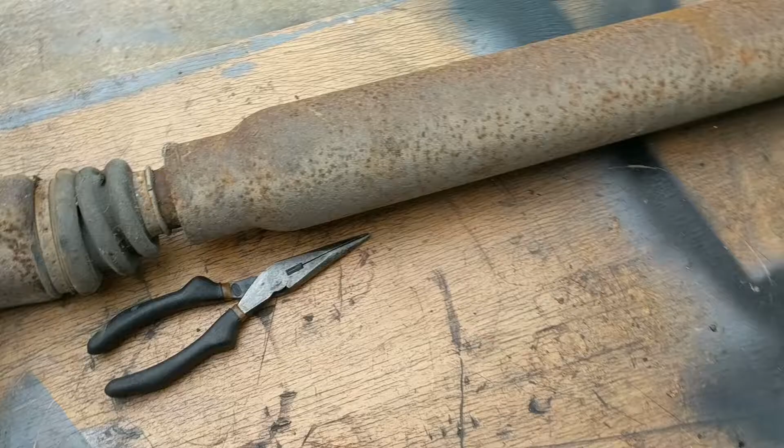Okay, the boot's got a little crack in it, so I'll replace that. I think this is pretty good shape otherwise.

Gotta get all the rust off it. I can't, my sandblaster got burnt down, so...

I hope it comes in within this area, but I doubt it will. Now this is the rusty one that I'm not using, but this is the same size, and it looks obviously a little bigger. So I'm gonna have to use some kind of adapter, and it looks like it might fit in that side. So who knows? Maybe I'll just be slipping it in.

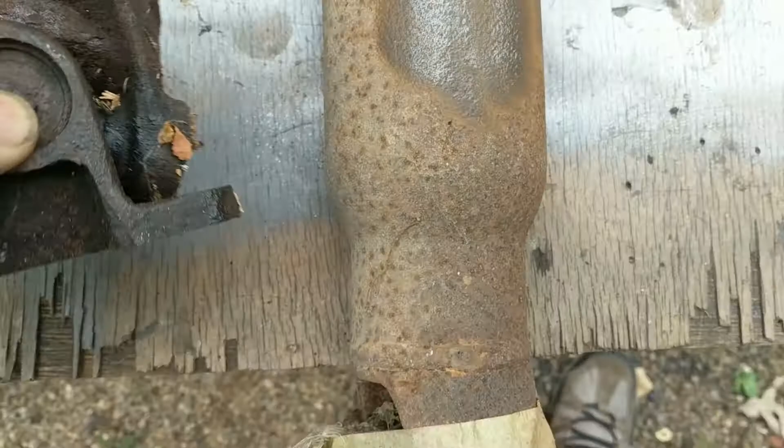I'll get one of these. I think these are Dodge Neon boots, they're on eBay for $200 or $250 freaking dollars, some bullshit. Get that one done, I'll show you. There's a couple different styles of these - one can be slipped in through, and one has to be slipped over.

I believe this is the over style because it's got this. I don't know, I gotta look at the manual, but one of them has to be slipped over, and one has to be slipped in. Can be slipped inside, you can see it moves about.

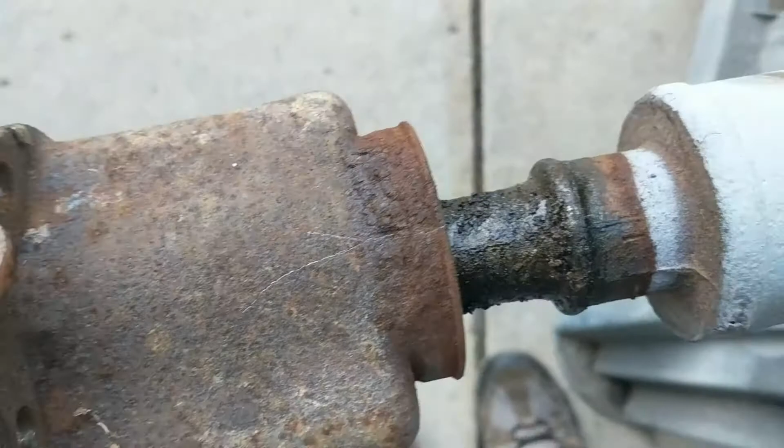It moves a pretty good amount. It moves probably 2 inches. The length of this guy is what it moves. So I let it kind of fall naturally where it was originally stock.

So I need to get this super clean to be able to get a good seal here and here. But I might go over this way - it's a long way to go with that small end, but we'll see.

I gotta get this open. Grease looks pretty good in here, actually.

It's a little rusty, but it's all cleaned up. I didn't have it sandblasted, but at least all the rust is off of it. Got some primer on it.

So the boot is a Dorman 614001 constant velocity joint boot kit.

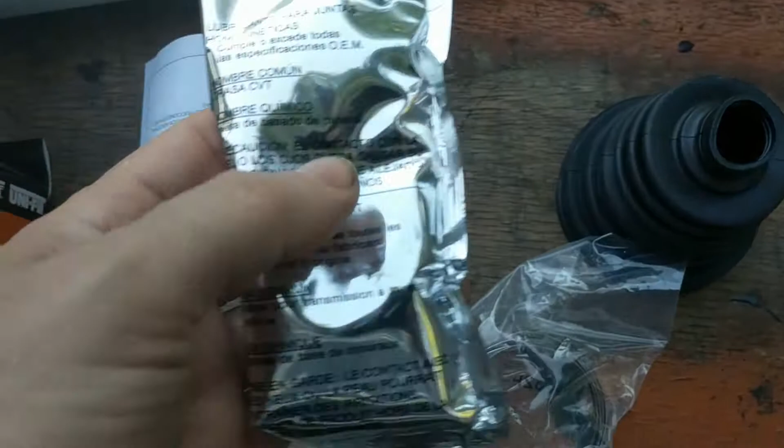Now this is joint boot grease, and you're supposed to fill it up, but I wouldn't do that. They are talking about centrifugal force, and I don't know what kind of grease this is, I'll see. I just don't think it's as thick as normal, so I'm just going to do what I need to do, get enough of it. So anyways, you use this guy, and it's a pretty good thing.

You just cut it as you need. So I'm going to cut it right here, and then obviously getting it on. We'll see about getting it on.

Somebody said take it from - well, some of the other ones you put in through the boot, in through here, and you take this cover off. I'm going to do that real quick, and you put it inside. And then another guy said just slip it on inside out all the way across the drive shaft.

I'm going to get color paint on the drive shaft here right now, a good black, like gloss black. So I'm going to get this off of here, get these cut, and get the cap off of it here.

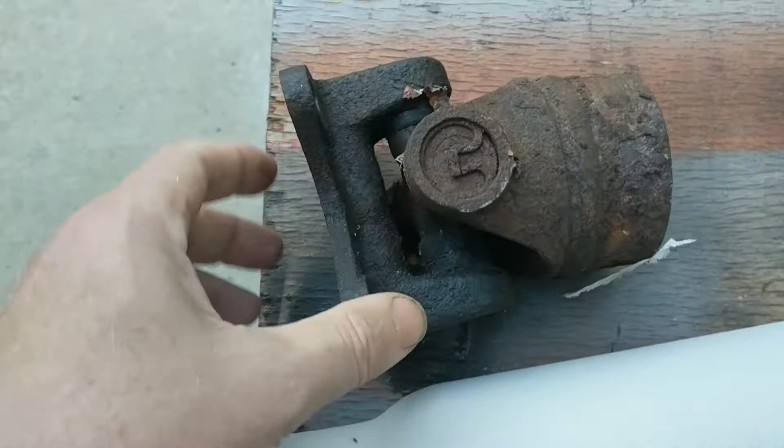You'll notice this is the end I'll be using. This is not the end I'll be using, but this is a rusty version of the end I'll be using. It's already in the car. I'll be taking this off of here.

More than likely I'll be cutting it off here. The drive shaft is too long with the Hemi, so size-wise it doesn't seem - it might perfectly slot right in. I don't know, so I've got a couple, 3 or 4 extra inches on the one in the car.

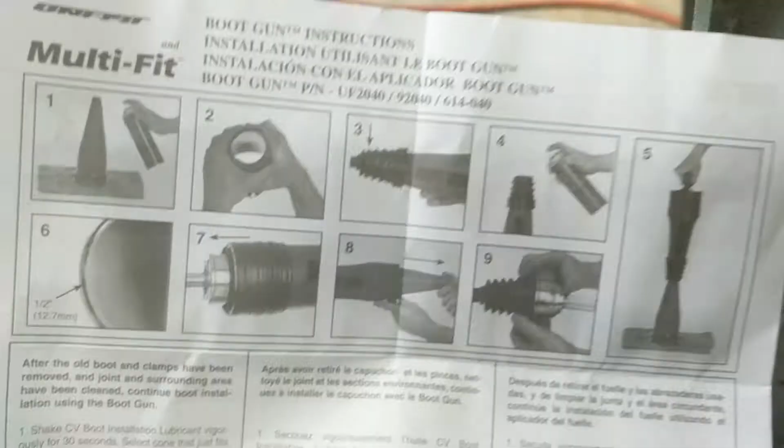So I'm going to go ahead and stick this up there and measure it first of all. Instructions show you using a boot - you have a boot gun, it's just a cone. You can use a funnel as opposed to pay the extra $10.

And then you spray it with stuff - some kind of, of course they have their own special lubricant, sure. Comes in the kit, I'm sure. Wipe it off, fill it full of grease, etc., etc.

I'm not going to do it on the car.

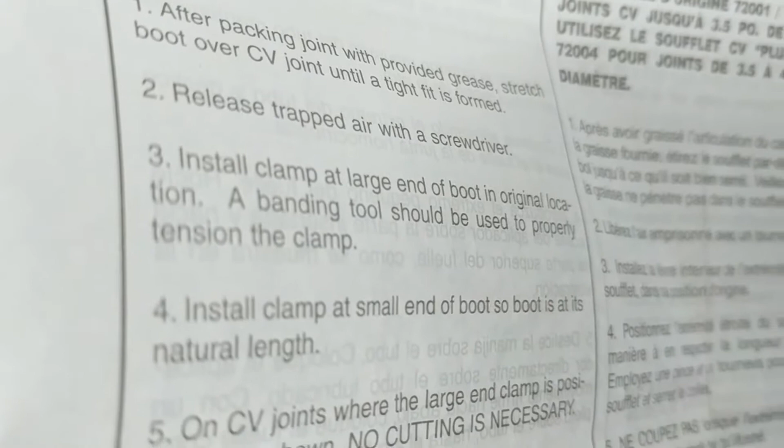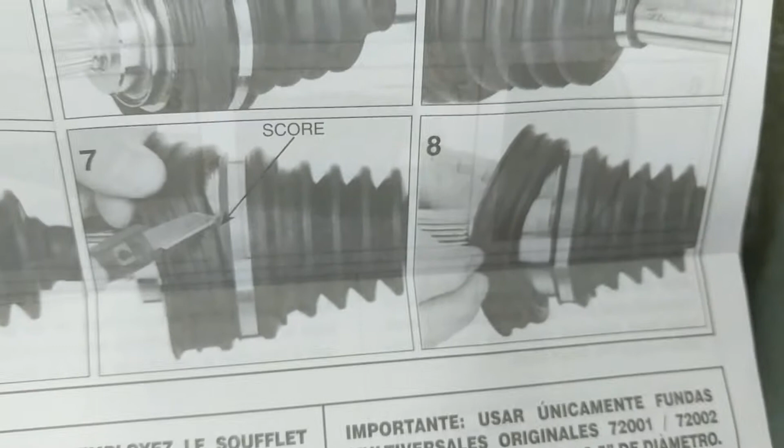Use the right size, release trapped air, pack the joint with the provided grease, and clamp it. They use, I don't know if it's a special tool or not, probably sell you one, but I think it's like a crimper. I think I have a crimper that'll do something similar. They cut it off after, just score it, so I'll probably leave it on and cut it off when I get done.

I kind of got rained out, and then I ran out of welding gas, so I couldn't weld the end on. But it's all cleaned up. There's some original grease in it, I guess it would be the fibrous grease, whatever it is.

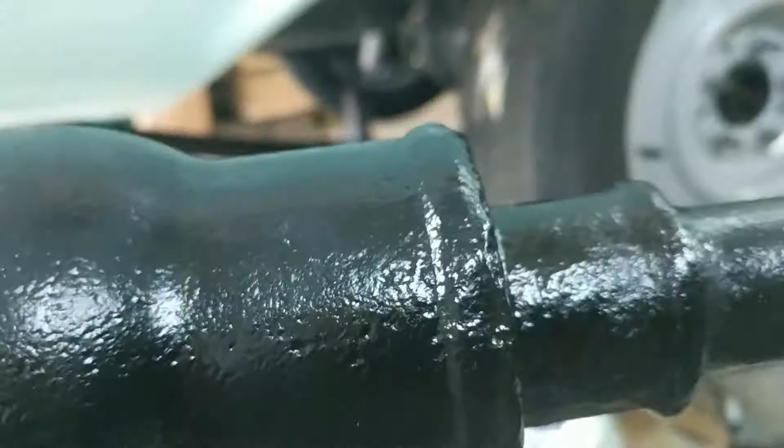It looks pretty good in there, not too bad. I'll put some more in there. Honestly, that's where you want it, out here - this is where the grease kind of sits, this little channel. I'll just put some more grease in there. It moves really good, this was pretty clean, there was no breakage, but it was starting to crack.

Now I'll figure out if I can slide it through or if I need to take it the other way, reverse it, see which way I have to take it. It's a pretty small hole, but they do it, so it has no problem going over the size. Obviously it's got to go over - they show it sliding over a boot pretty darn big, so it's not going to tear it or anything.

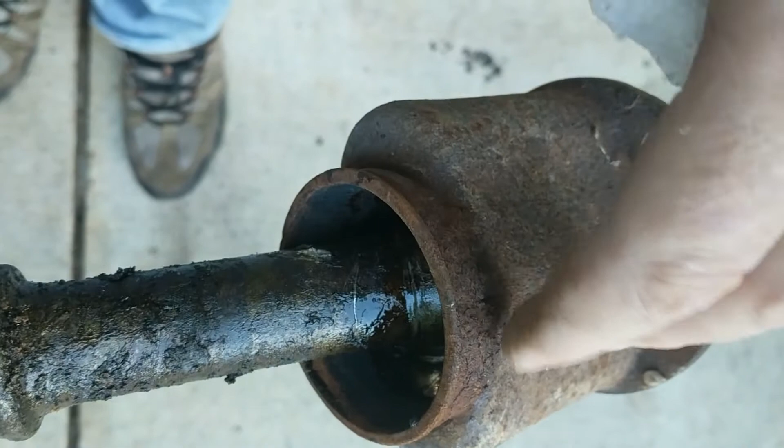About the grease - it says fibrous grease, the factory manual calls for fibrous grease or whatever that is. Some people say you should put padding in here, but that's just fibrous, it just means the grease is really, really super heavy. It says use 1.5 ounces, but I'm going to use what I got, probably some special molybdenum grease in here, so we'll see.

I'm just going to pry these tabs off, and when you're prying these off, make sure you don't take them any farther than you ever need to go. You don't want to break these, so just take them off far enough to clear that. You might need to take them all the way completely off, just so you can get it loose and moving.

I think I'm just going to drag the boot through here. Obviously that'll get all greasy and grimy, but I'll get some gloves on and hopefully it won't get me too bad - it's going to be a nasty job, but let me get this off.

Since I can't do this video and do the same thing, what I'm going to do is just slip this guy through, and I did pull all the grease out. I'm going to use some synthetic Durablend, the molybdenum stuff - it doesn't matter, this is good stuff, it's synthetic, it's all the same. This stuff is actually pretty dried out.

This stuff was pretty dried out, so you can see it definitely needs replaced. So I'll get some new stuff in there, all packed nice. I'm not gonna go crazy - the majority of it's spinning out here on these edges, you really don't need anything in here because there's nothing there, so why would you need to pack this full of grease? I'll just pack it kind of full and call it a day.

Since I'm shoving it through, I just put some silicone stuff here. And since I am shoving it through, I cut the back end off - why shove even more through that you don't need to? I'll trim it to here when I get there.

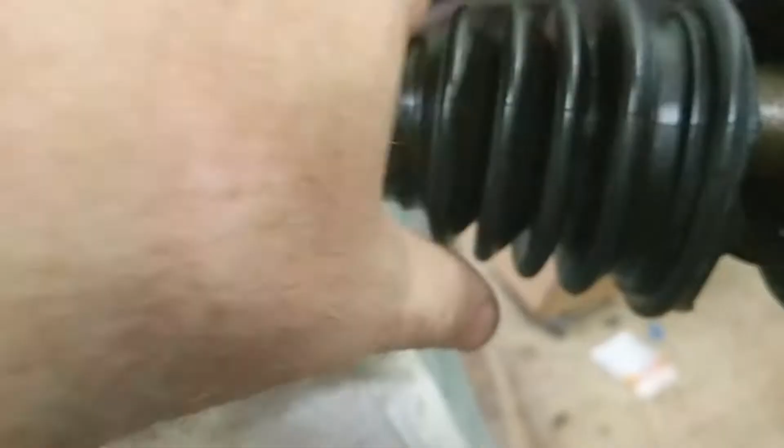I'm just going to shove it through using like a paint stick or something to get it through here. Silicone makes things a little slippery, but eventually you'll get there - kind of got to push it in and then peel. You'll eventually get there, and there's a little ridge right here, so I'm going to use that ridge to put that piece right there.

Pack it full of grease, and then get these clamped on. Like I said, there's basically no grease in here right now - it was cleaned out of all of it when it was pretty dry, so I will. I might clean up some of the rust here.

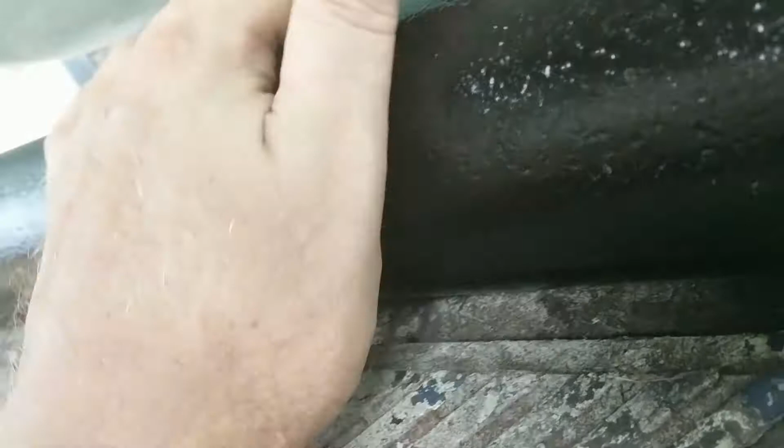Get this nice and clean, and then put all new grease. But all in all, this drive shaft was in good shape. I know a lot of people's aren't. It did have rust on it, so it looks kind of... I'm not a happy camper about this. I like to have a nice, smooth, perfect looking drive shaft, but it is what it is.

So I think I only have a couple drive shafts missing for cars. Most things I get is junk. Since they're just haulers, people have undone the drive shafts a lot, or they've taken the engine out.

Okay, don't forget this thing lines up with this hole for some reason. I don't know why, but it does. So line it up correctly and slap it back on.

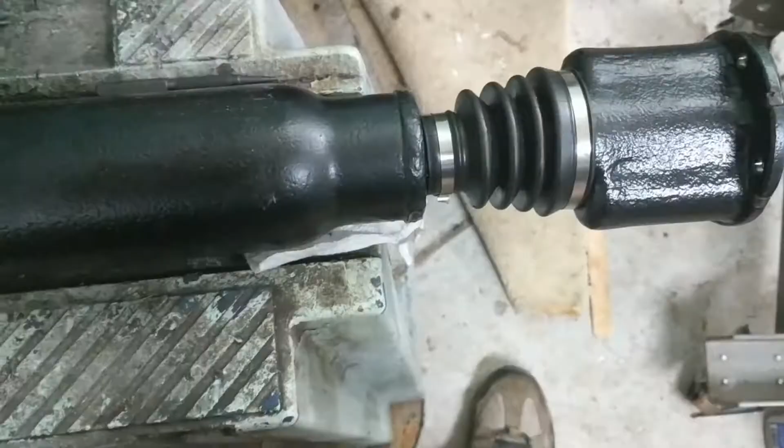Okay, you got the tools for these. It makes it a little easier on these things, but you can see there it's moving. This one's moving a little bit, but you need that tool. This one's nice and tight. This one's not quite, but these things have lips on them, but everything's nice and greased.

Final product ready to go back in the car, at least on this side.

Front job complete. Now I just got to weld here. So yeah, still looking at the clearances, of course, but anyways, that's the boot, and worry about the drive shaft later.

Okay, I did jack the rear end up as far as it'll go, and you can see it's probably not 100% road, but obviously the weight of the car now is on the rear axle. They've lifted up a little bit off the jack stands. That's not good. I need to move that up a bit, but the weight's all on the front of the car right now, and the back is obviously on the middle of this jack right here.

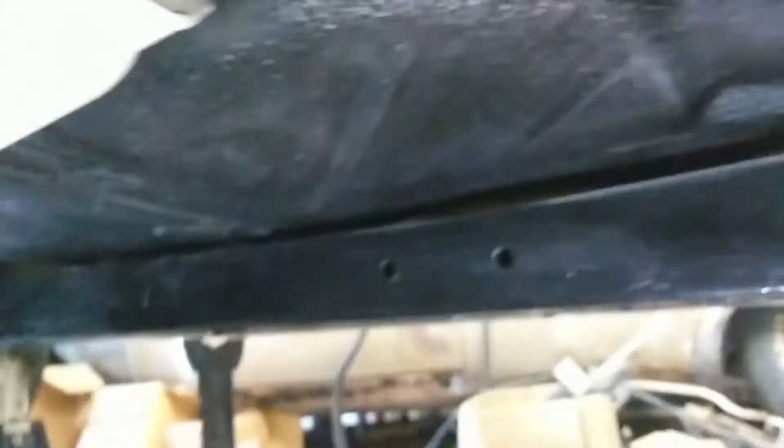So there's the new back universal joint, but I'm going to go ahead and measure it up here. I just stuck two nuts on it, and I lost some of my paint, my paint's peeling off my POR-15 paint. Anyways, kind of dirty. I guess I could touch that back up.

But this is actually a brand new parking brake, disc brake, and everything. So I need to get in here and get this hooked back up. But all the hardware in here is brand new. So I need to finish locking this puppy down.

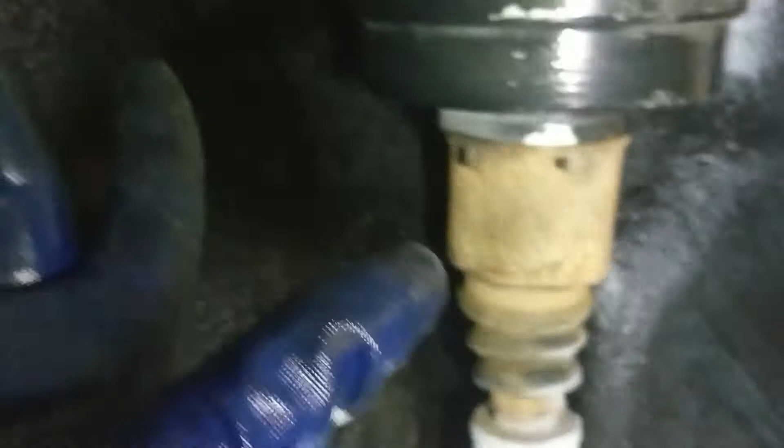I need to coat this back end here and the back end of the torsion bar. Probably coat this with grease. I don't have the caps on the 57. I need to get these bolts up here locked in. Everything else, these guys are in. Need to get some, and this transmission will be locked in, and that's done.

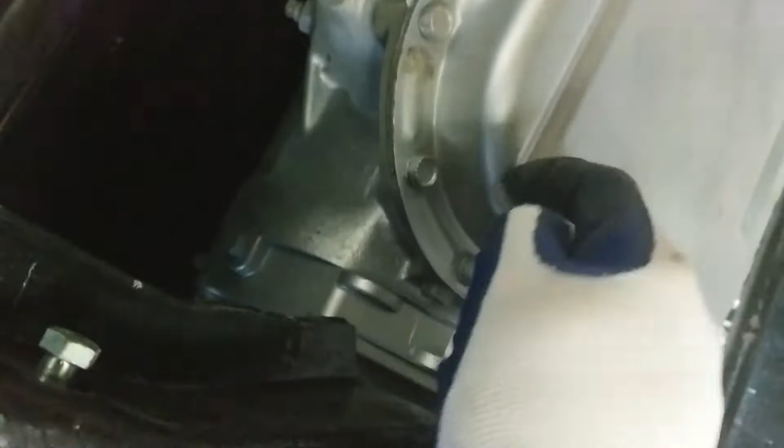The lines are already hooked up. The lines are hooked up. Got new oil in it. So anyways, you can see I got this.

So I need to just go down here and measure this puppy. It's underweight, you can see it's actually off the jack stand. I didn't like that. I try to use these gloves and stuff, welding gloves on my jack stands, but I didn't have enough.

So I'm probably going to end up reshooting some of this frame, just touching up because of the green. I need to get rid of this green stuff here that came through with the internal frame coating spray. This is tape that's left over. I'll wipe that off there, but yeah, I love this green crap, came all over the place.

So anyways, there's the fuel line. Got some attachments for the fuel line. I was worried about this, but it should be okay.

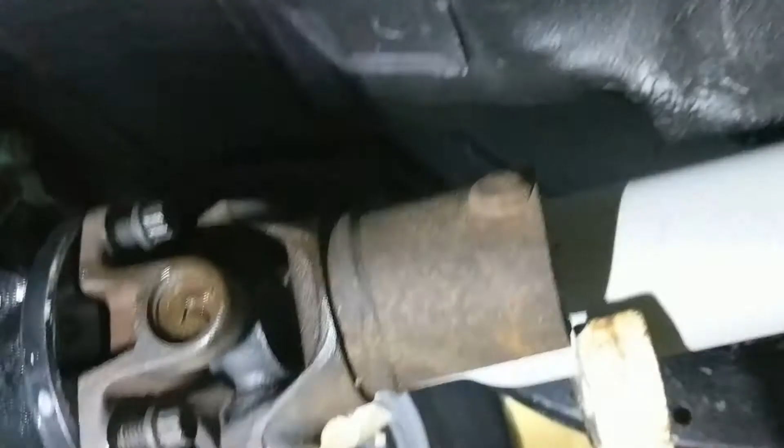So we'll go back here and measure this thing. Okay, I got them side by side, and I'm obviously going to get rid of this weight here. So I'll probably be cutting it off right here. I'm going to straight edge it a bit, so I'm going to double check my straightness here and probably do it somewhere along here.

And I think I'm going to potentially add, like this is all down, I might add a quarter inch for spacing, because I don't know, just to be safe to have. You don't want it to be too tight, so I don't want that to be locked in there, because this obviously, you know, it expands a bit back. So I'm going to probably give myself at least a quarter inch from the cut, in between the two cuts, to move back a little bit. Move this drive shaft back just a quarter inch to make sure I have the clearance.

So it looks like my cut mark is going to be, obviously I don't want it down here, so it's going to have to be here. So I just have just enough. I'm probably just going to cut right here. So anyways, the mark will be like right here. And I'm actually going to get a square here and try to square it up a bit, do the best I can, and then, like I said, take a quarter inch off and then weld it.

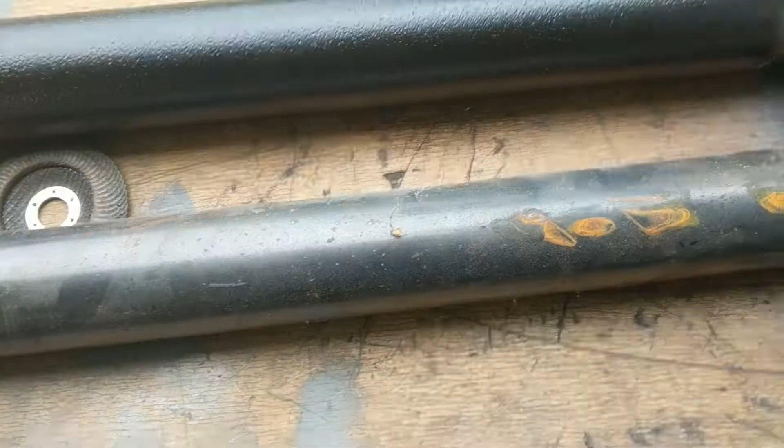So the issue is to get this Ford 8.8 inch Explorer drive shaft end into the 57 Dodge drive shaft rear end, and obviously this is not good.

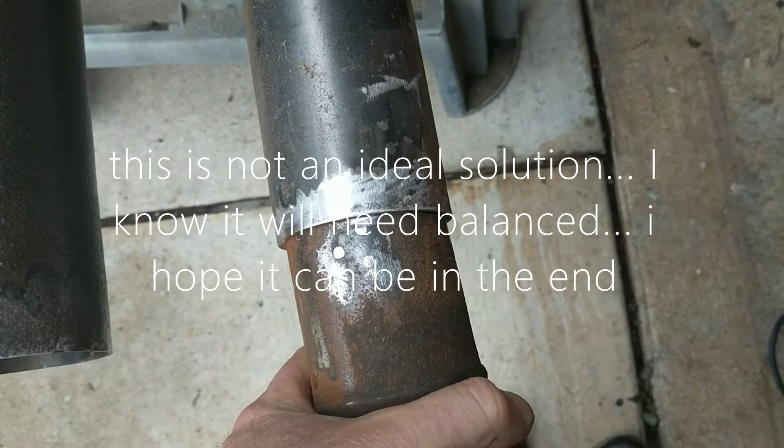So basically I have to be able to center this distance perfectly. It's a little difficult to do. I think it's 170 thousandths, but I did find this - a 3-inch pipe that I happen to have, and it fits the Mustang 8.8 perfectly. So this will help me close the distance. I believe it's an 1/8 inch tube, so that'll help close the distance, and then I'll just be, I think, a 16th in, and I can deal with that.

So this needs to be cut cleanly, and I'm gonna actually stick it in here and use this as a guide point because it'll be straight and aligned. Then I will end up cutting a piece off of here, hopefully as straight as possible, and then that will go into here, and then I'll get a spacer around it, and then I'll be good.

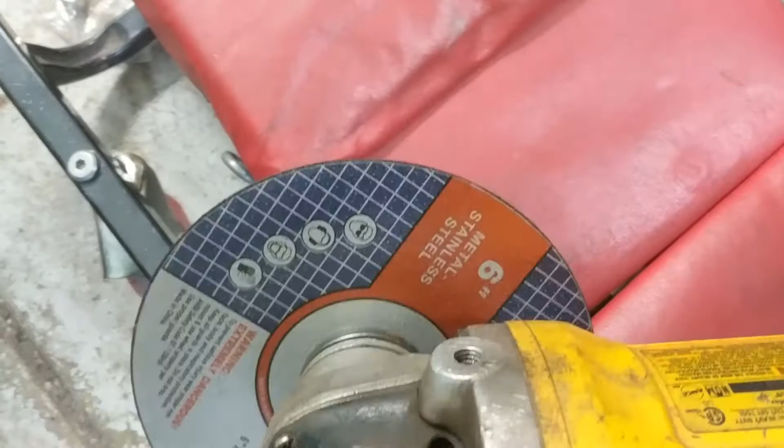I bust out the big guns when I'm cutting drive shafts - the 6-inch discs. That just gets you maybe a little straighter line. Not huge, but it can go halfway through, keeping half of the side straight. So you got to watch these ones, they're nasty, but it works.

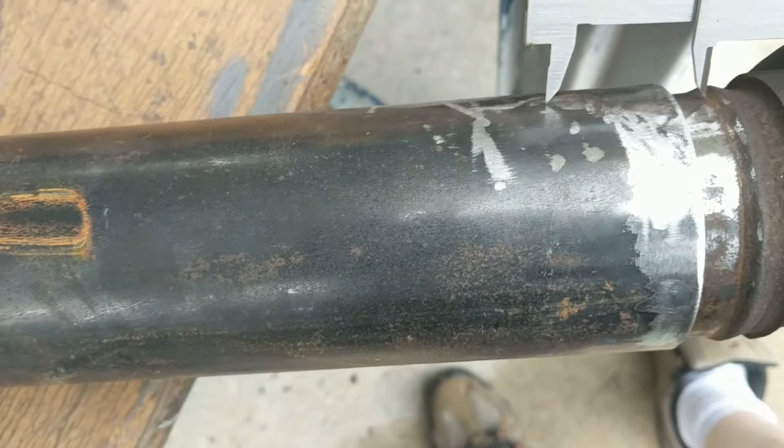Okay, so I've got my measurement here. From this point to this point is where the drive shaft from the 57 Dodge has to meet. So what I've done is I've shoved this inside of here, pounded it in a bit, and it is nice and aligned. It should give me a pretty darn good straight drive shaft, and that's really the issue - make sure everything's perfectly straight.

It's kind of hard to do when you're welding multiple tubes together, but as long as they slide in - this is the correct inner and outer diameter to lock it down. So I'm going to go ahead and put a big giant bead here and smooth it off with a grinder so there's not big blobs of weld and stuff.

But then I'll cut it here, probably out here or something, and then I'll figure out another way to get another spacer in between this surface, and I think just a sheet - 18 gauge or 24 gauge sheet metal. I'll have to do that. That's not ideal, but I need something to get it squared.

Okay, so the drive shaft is done, and it says it's not a big truck, it's a series of tubes. That's an old internet meme, showing my age.

All painted. This is it - not perfect, but it's pretty darn good. Stretches from here to there, and basically it'll sit here. I did everything according to, I kind of put it in the middle is what I did, and then that's my spacing, and then I put pressure on the rear end. So anyways, all nice and clean and painted.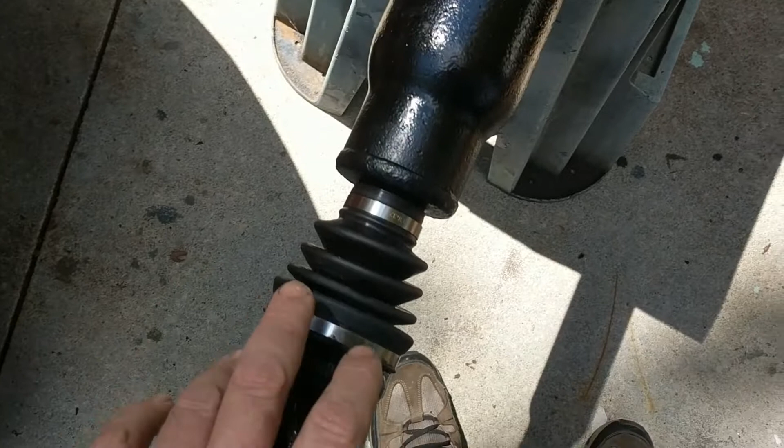Not this $300 garbage, but I think they brought the price down. It's like if you need, you get $250 for this and the piece, so that's not bad, I guess if you need it. But all nice and shiny and new.

So this is way stronger than - I'm worried about the weight back here, but it is closer to the end. So if I have to, there's actually a local drive shaft balancing shop, so if I have to I'll take it out there if I get vibration. These things were never balanced from the factory anyway, so we'll see how it goes.

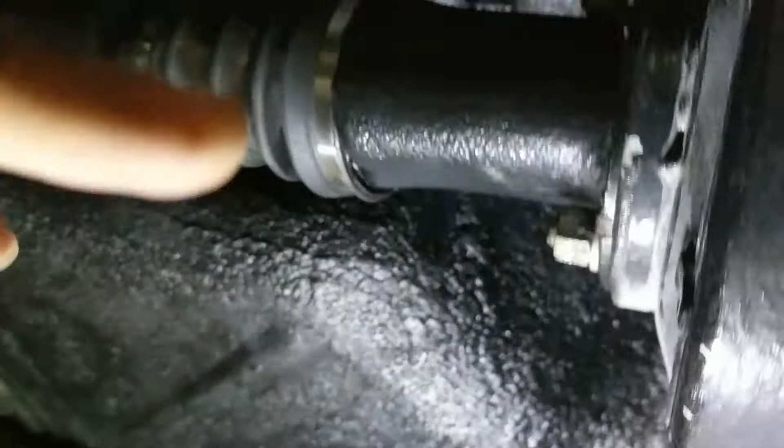Okay, this part of the drive shaft hooked up. I'll show you how a Ford 8.8 - obviously the pinion angle is good here. It's got a little bit of an angle. I'm worried about a little bit much of an angle here. I know it's probably pretty straight coming off the original engine.

I've got a bit of an angle. You can't really see it because I can't get a camera far enough, but you can see that's about as far as I can get it. You can't really tell, it's got a little bit of an angle going.

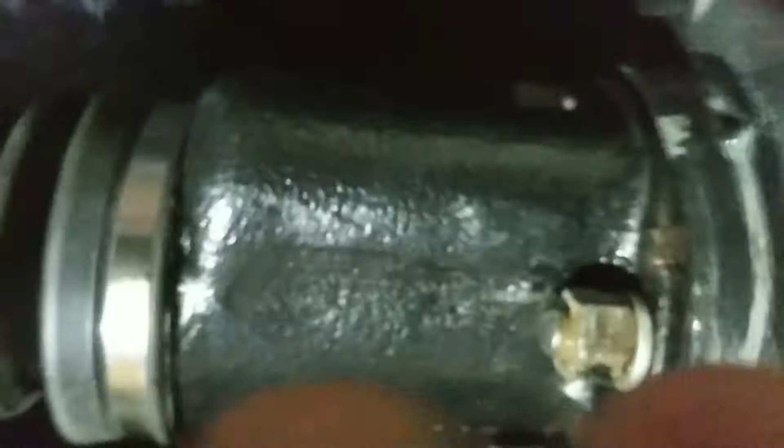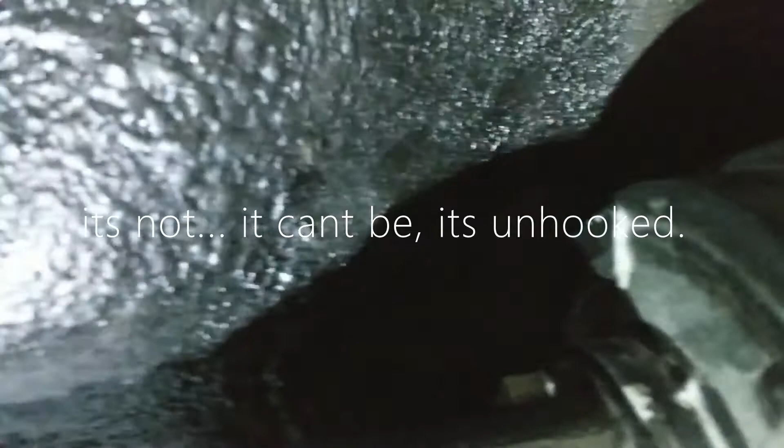Looks like my parking brake is partially engaged, so I'm hooking my parking brake up also. And it's not - it can't be, it's unhooked. So yeah, it's locking up, I think. Something - oh, I know what's got it.

Paint's peeling on this thing. There's some dust and some of this. I might have to touch this back up, like I care.

Get the dust off it. This guy's secured now. You can see the pinion angle, you can see the offset. It looks pretty good. It looks like it might hit if it had to go up. This isn't the problem here. These aren't the problems here, right?

So what happens is the drive shaft does drop, it drops down out of the car. So by the time it gets back there, it's not going to hit that edge, because I would be afraid it would hit that edge right there if the drive shaft had to fully sink up in there. And I won't really know.

Problem is, I'm trying to hook that drive shaft up back there. Three of those bolts are locked in, but I can't do anything about the fourth one because I stuck it in the rusted holes. There's 8 holes, so I stuck it in the rust hole. And I think if they do it for vibration, they'll rotate it to the next set of holes. If it's vibrating, I won't know.

I mean, they said even if you look at the factory instructions, they said even an overspray of rust proofing will cause a vibration. So I'm probably going to have to take this thing out to get this guy balanced, and hopefully that would get rid of my vibration.

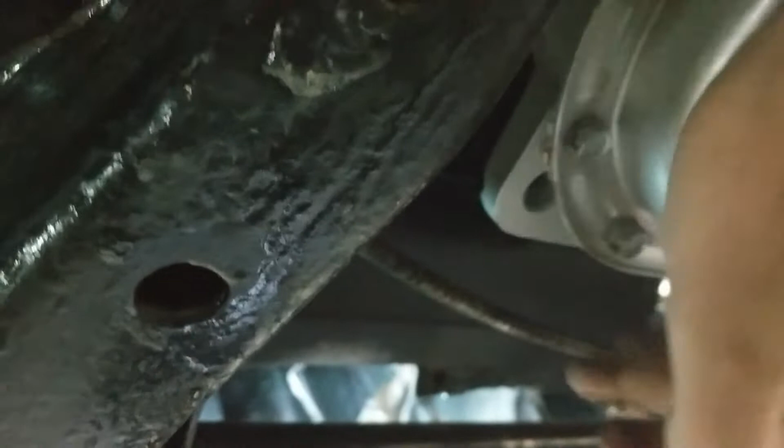I'm gonna go check my 300C over in the garage and then see. So the cable comes in here. Now there's a big piece of rubber right here that you have to get out, and it's actually a rubber insulator, like a water sealer thing, to stop water from coming into here. And you gotta get this locked down.

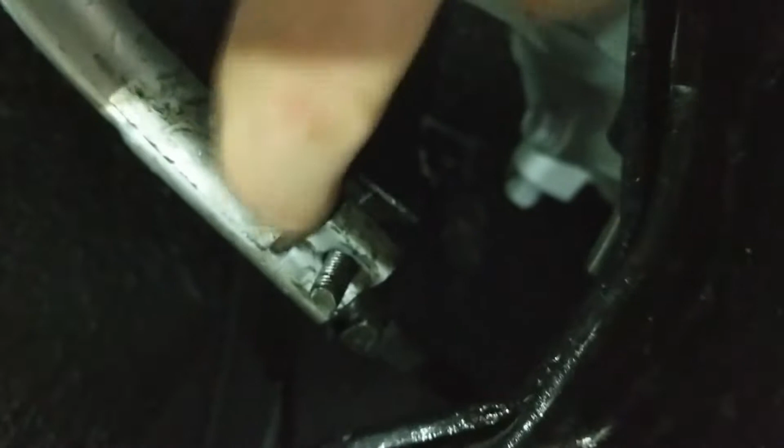I think it's not a half inch bolt, smaller than that, but this crushes this seal in here. There's a big rubber seal that wraps around and then comes into here. And I've already got it hooked up.

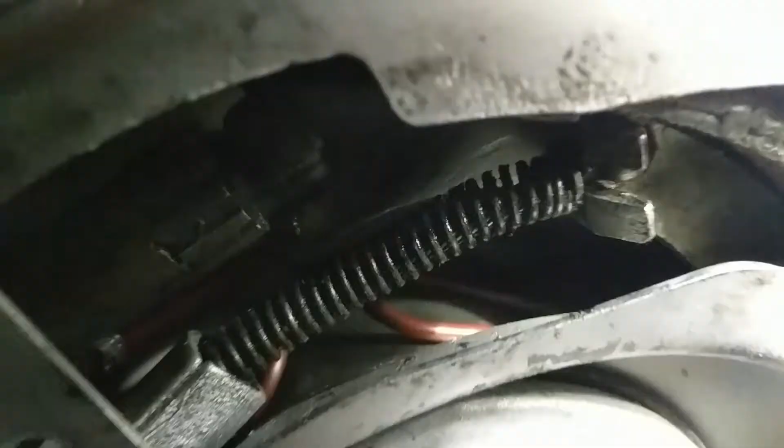And inside the parking brake, you'll see this, if I can get under here. Come on, that's stupid. So here's the parking brake connected, and then there's the adjuster. This is all lubed up. Like I said, it's pretty much like new. So I'm going to go ahead and lock this down, and I think it's too tight right now, but I'll get it locked down and adjust it out.

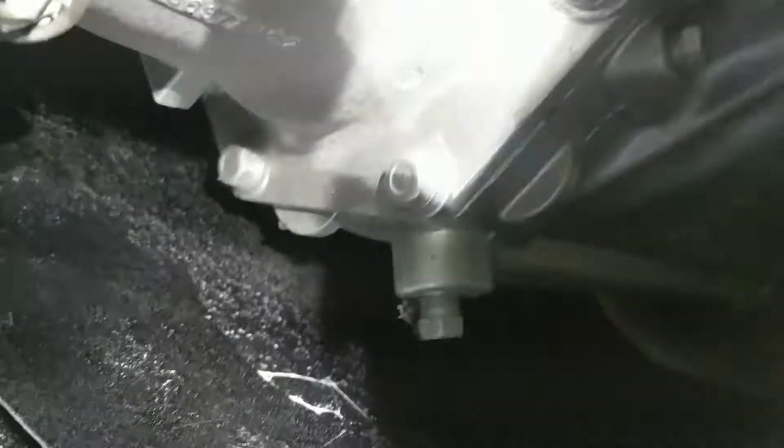So you adjust it from up here. There's 2 screws, 2 bolts. You can see 2 bolts here. You're going to see 2 bolts, 2 nuts right there on the end. I got to double check to see if that's how you adjust.

I've got the one I cut out of it right here. So this is the one I cut out of it. Yeah, you'll see these 2 nuts right here. This is the one, this is the rubber. The rubber was sitting in this.

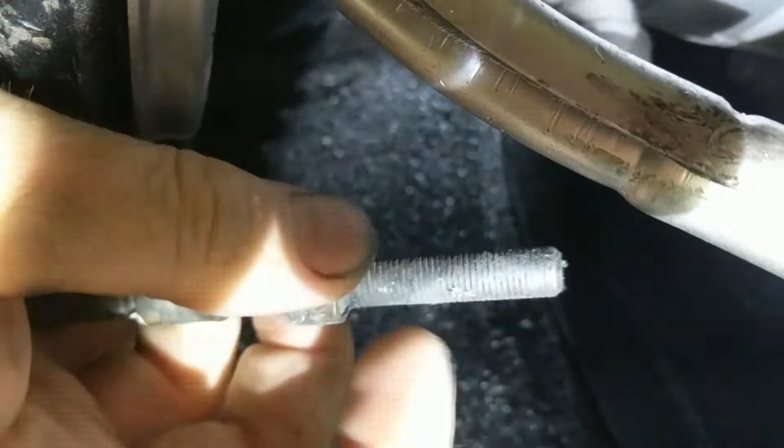So I think you got to agree. I lubed it up to slide it in. It's kind of tore up, but it'll work. And then this is the cutoff cable. This was the one I cut out of the original parking brake. So this guy goes here.

And then this adjusts in and out here. This stays here, but this adjusts in and out, and obviously you'll take this and this will come out more and more and put more tension. So I don't know where

this guy is in relation to, this is pretty far off. This is already down here. I think this one is... I think it's all the way to the top. No, it's not, it's even farther down than this one. It's probably too far down.

So I need to back these off a little bit, and then I can relock this, and then this locks the piece in tight, and obviously the pressure goes against this. So it just gives you that distance of the adjustment, and then there's the adjuster here too, and there's adjuster here. So that's the pad in and out, and this is the cable tension up here, and then this is the pad, the actual pad in and out distance. So I'll get, see what I'm gonna have to watch the directions on that, on the factory directions.

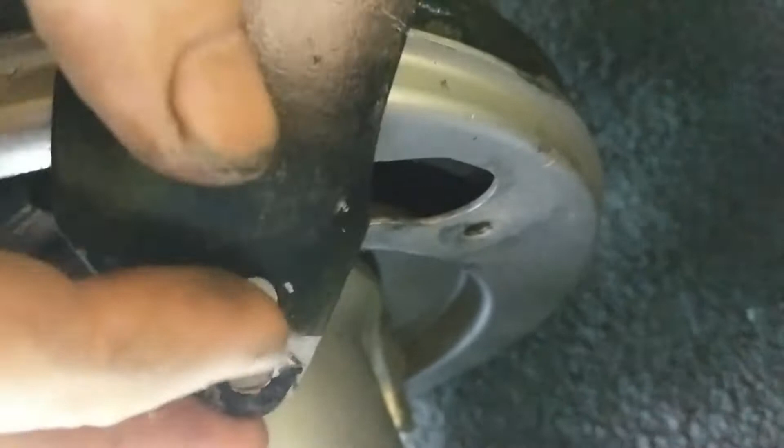So then there's a cover plate, and there's 2 bolts. So this cover plate goes here, and it's got a hook. So yeah, I painted it wrong. Yeah, it goes here. So, and that cover plate will go there with some screws. But I guess you just hook it here, and then slide it.

So see how that goes. Anyways, I'm gonna have to watch the directions on this puppy. So now this is the inside of the parking brake here, and you're gonna notice this guy. Now I have this backwards. Typically it doesn't matter though, as long as the cable lines up on it, and it does.

And you can kind of see the play on the pad, if you can see it here. Like I can feel the pad go. You'll hear it. That was a pad play.

So let me try pushing it back. So this is the lever, and you'll just see this lever come here, and it compresses across the top, etc. Now you spin this whatever direction.

Now there's a nut here, there's a bolt here, and you'll see the threads here. If it'll focus, anyways, you'll see the threads here, and you can't turn this because there's this notch in the back, but you can turn it hard with a screwdriver, and they have a tool for it. You can see I kind of boogered mine up.

But anyways, when you spin this, spinning this down on this side. Now this, if it's reversed, obviously that's not right, but like I said, it doesn't matter which way it is. The manual actually shows it being the opposite way, but obviously you need to get to this thing.

So that does this little spacing of the pad, and then what they do is they say you turn this. And now I think I have some issues with it hitting. It's actually hitting right here.

That's when I put the damn thing in. I lost some paint. I might have to touch it up, but I don't really care.

But you can hear it, and that's not pad. You can hear pad when you hear it. Like you'll hear pad, and pad's a different noise. I don't know, that sounds like pad, but...

You turn this side would be down. If it's opposite side, it's probably up. I don't know. Anyways, just make sure, you know, obviously this is the nut, and this is a nut going on it. So off is down this way for now. It's the opposite way, it'll be up, I guess.

Yeah, so anyways, and then you got the 2 screws here. You got to take this little cover off here. But you can see this thing when it pulls all the way up to here. Now I thought it was nicking here and stopping it, but I don't think so. I just adjusted the cable.

So what I'm going to do now is I'm going to lock this guy. I'm going to take this guy, I'm going to lock it, and I'll put that lock nut on there. Man, this thing's annoying, it was falling apart before. That won't come undone. So I'm going to lock this guy down and then lock this bolt back on it. And see how it does.

It did well, if I pull real hard, but the throw was really long, that's why I had to adjust this. If the throw is real long, this is your problem, because this is taking up the slack.

You do this, this is for pads. This is for tightness on the pads, and then this is for the cable throw. So obviously, you know, they work in conjunction with each other, but this is your main pad driver, because it takes that distance up. So if the throw won't go... but anyways, that's how you do the parking brake.

Next up is the throttle cable.

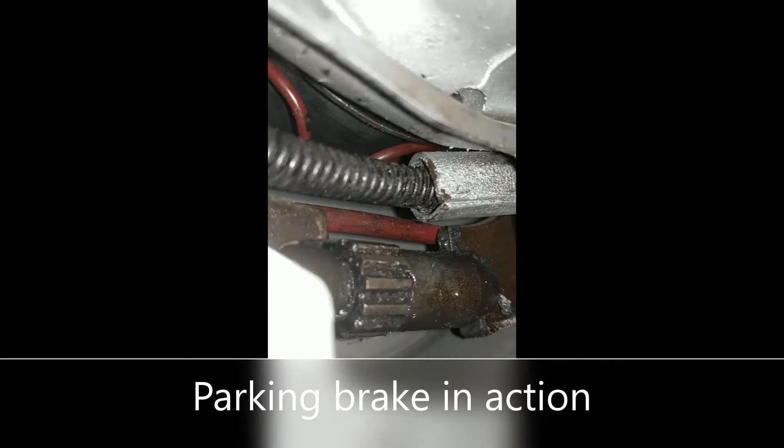Okay, so seeing how I need some space for my gas tank to go down, because as you can see, my gas tank's plug is just too high right now. I can't even get the gas cap on it, I'd never get a cap on it, so it's got to go down about a half inch.

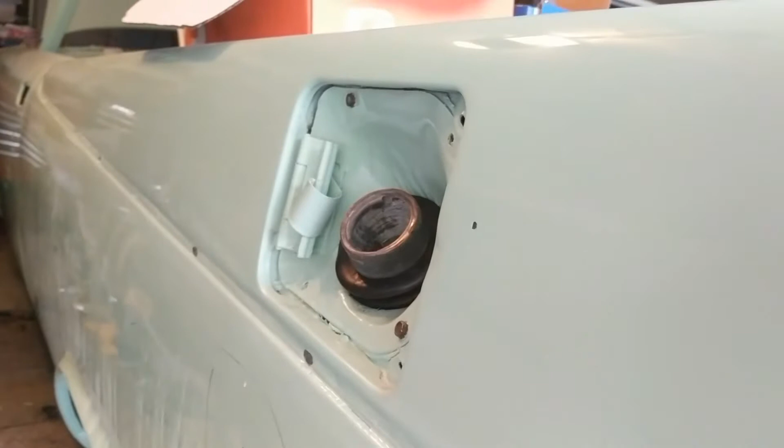So I not only need some sound insulation, so I went and got this stuff. Now this is 1/4 inch thick. Now I got way more than I need. I got a 42 by 120, and I'll use this for something else. I'll use this for flooring here, some padding.

So let me show you. Looking at a factory install on a 58 Plymouth, you can see the seal. It's kind of got this little knob, like you could kind of grab it, and that's pretty much flush here, and then flush with the bottom of that lip. So I'll show you mine, current one.

Okay, I got 4 of these straps, 1.5 inches wide, and I'll just put them like that.

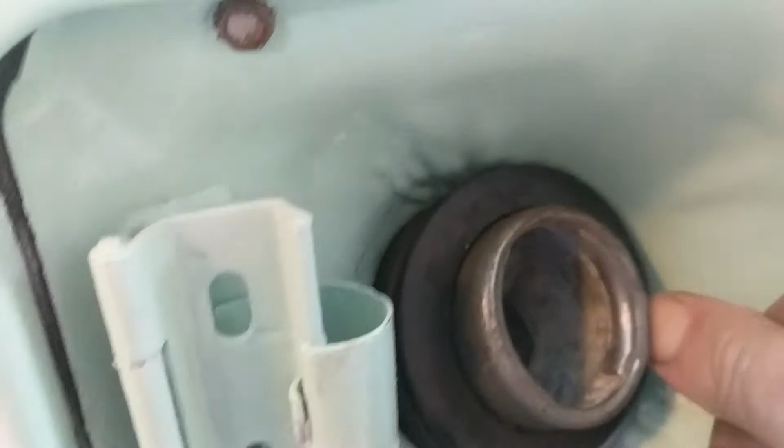So that should get me my extra space I need on the tank nozzle. We'll see if that works. Okay, so it's pretty darn close. This can go down a bit more. This is probably going to pass muster now.

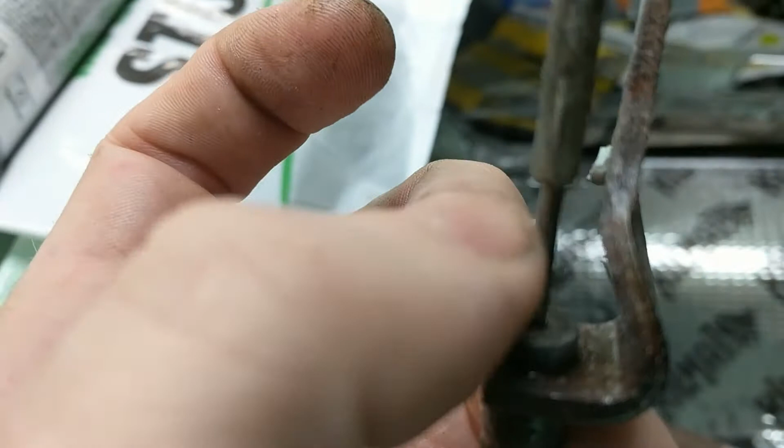Okay, while you're here, don't forget to lube all these up. I poured oil down this guy. This is the shift cable, so you're going to have to, if you put oil right here on this line and then push it in, that's what I did, just keep going back and forth. Put oil on it, push it in, put oil, and eventually it'll get in there. So this is all nice and free now.

So I did the same thing for the speedometer. I actually pulled the speedometer cable out of it, filled the whole thing full of oil. Now it spins real easy, like zero effort, because it'll come out on the front end. Typically these are caked full of old conventional oil, so I put a nice synthetic in there. It should last a lot longer, probably my lifetime.

It's all nice and freshly painted, good enough. It'll do good.

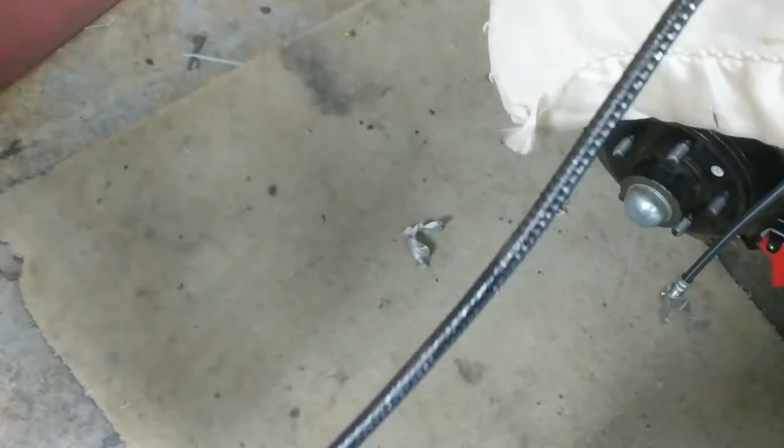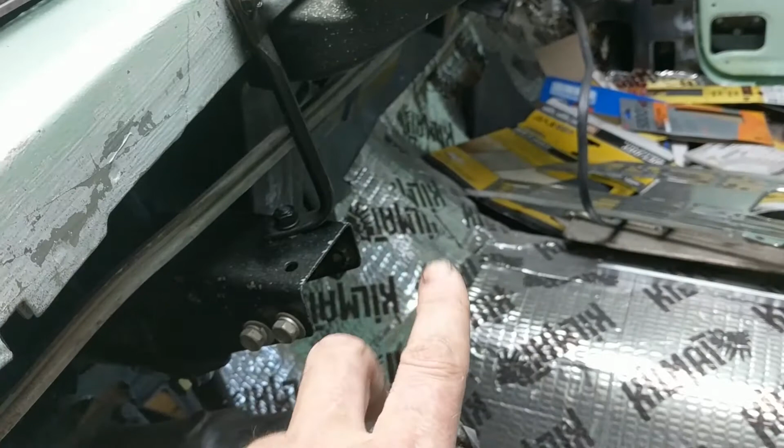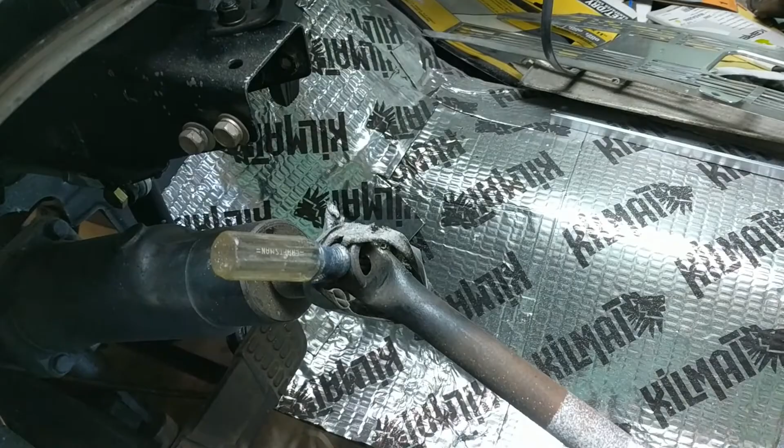So what else? Yeah, so I'm gonna actually start. All this stuff is pretty much done. Get the heater in it, and start wiring here. I'm gonna get the speedometer cable in, brake cable, or brake cables, shift cable. I might see about the foot pedal yet, I still gotta put that in there. Parking brake cable, it's already in there, just secure all those lines. Get the fuel lines hooked up with the carb on it. Get it on the ground, and start the wiring. The wiring is really going to be, and I'm going to be cutting and buffing between that, but it's not pretty, got to get the car cleaned out here first once I get on the ground.

This is a proportioning valve I have, it's a Mopar one. I've got the 3/8 to half, I think this is a 1/2 inch to 3/8 adapter, I'm not so sure. And then this one's got 1/4 inch and then 3/8. So it uses like a bunch of different sizes, kind of freaking annoying. So I ordered a 3/8 adapter kit, there's like a box that just has a bunch of them. It's on eBay, I think the dude's called...

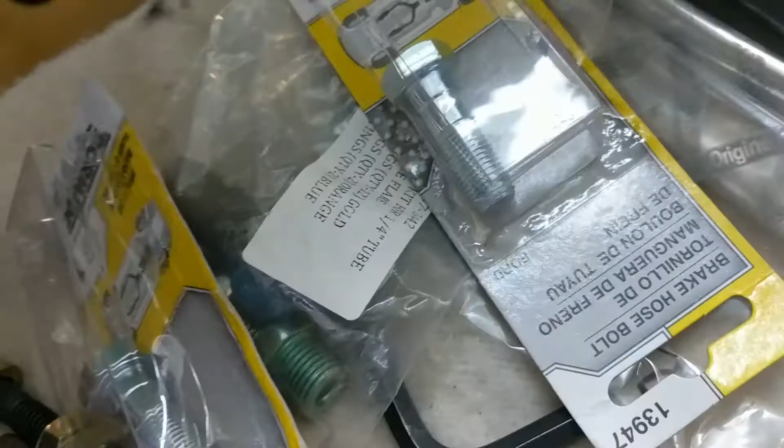You look on eBay, the dude's called the Stop Shop, he's got these. This is a 1/4 inch adapter fitting kit, but you don't want this one, you want the 3/8 if you're going 3/8. Now these things are a little bigger too, so I'm gonna drop them down to 3/8. I don't care, I think this is a 1/2 inch and this is like 9/16.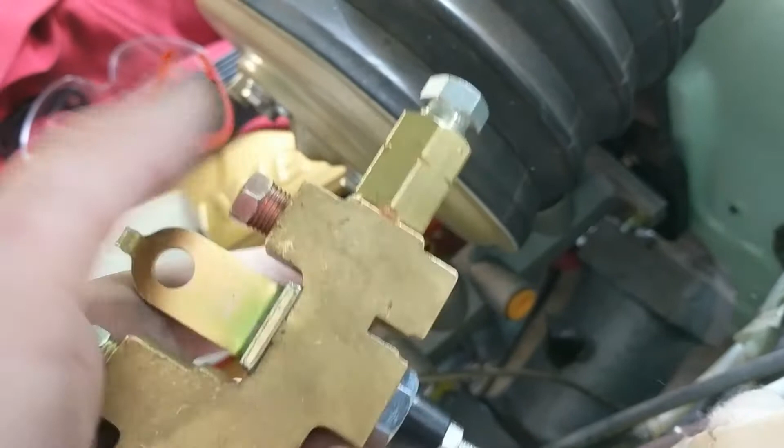And then this one, I think this goes to the left, this goes to the right. And this will connect into the... and this might be the rear, and this might be the front. I can't remember, I'll figure it out. And then I think it's got to be this way though, sorry. They have this adjuster on top, figure that out. So it'll be something like that probably.

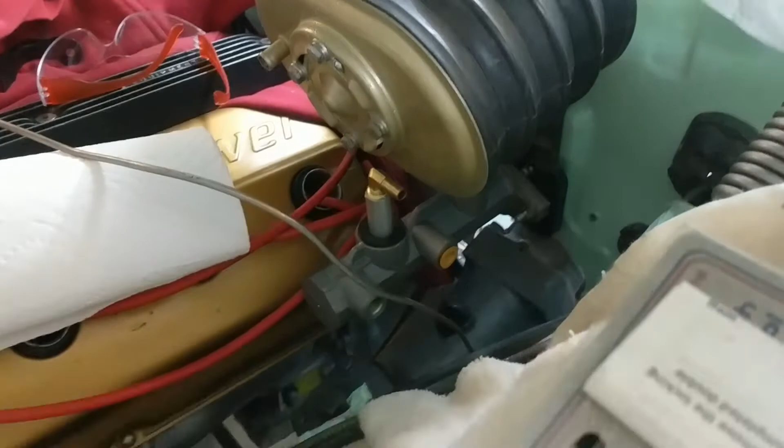You got to get this fairly secured, so I'm going to extend this bolt, get a bit longer bolt for this and then put it out inside of it. Maybe put it right up against it, but on the master cylinder there. It's got to come out a bit though to get around this. So still got a bunch of work to do, but that's brake wise, all kinds of brake pieces and parts.

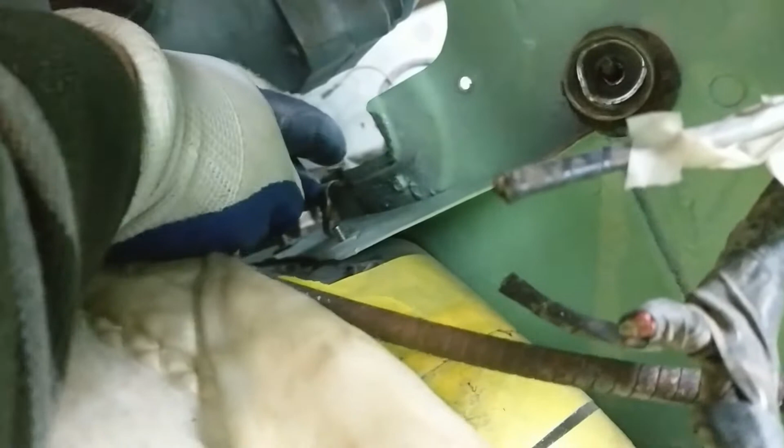I need to make the bracket to hold it on top too, and that's about it right now. Okay, I'm getting the, this is the shift cable here, coming down here, I gotta get this thing cleaned up. I should have painted this one, I'll have to paint this one by hand, which is the parking brake. And like I said, typically there's a clamp right here that it goes through. I'll probably reinforce this guy because this will come over to here, this will come back here.

It'll go in here, but I don't like it, I think it's just too weak here. So I'm going to put some new bracing in. I'm going to run the speedometer down here too if I can. The speedometer comes out here, and I don't think it goes there.

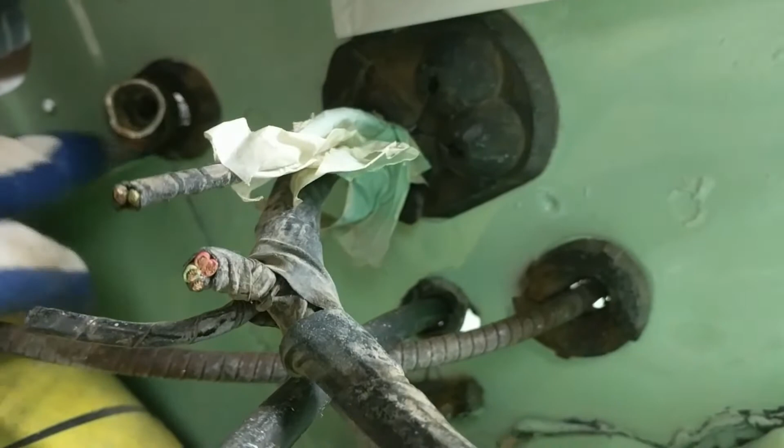I'll get some nice synthetic oil down it, and I've got it almost painted here. This wiring harness is all going to get redone, so I really don't care about this. But like I said, this is your speedometer, here's your parking brake, and here's your shift cable.

I don't like that grommet, so I'll have to figure out, either put a new one in there. This one could be closed up with some dum-dum. Shift cable, you can see this. Now this plug, the one that plugs in, locks in.

It's all nice, I cleaned the paint off and everything. I'm not going to worry about this, that's going to be good. Everything, keep this looped up. I might put some oil through this also.

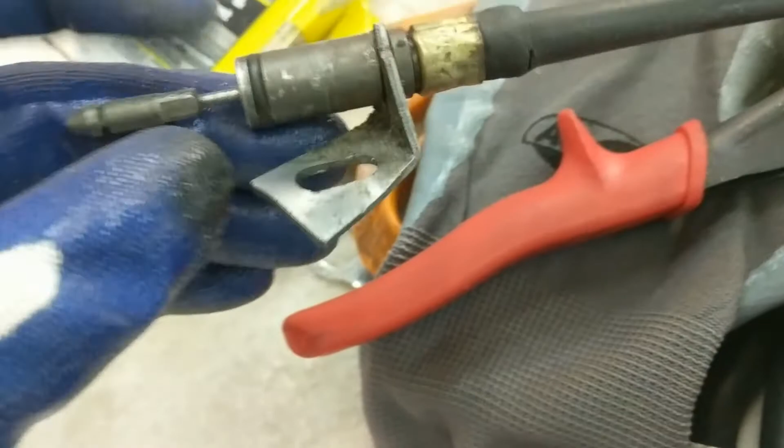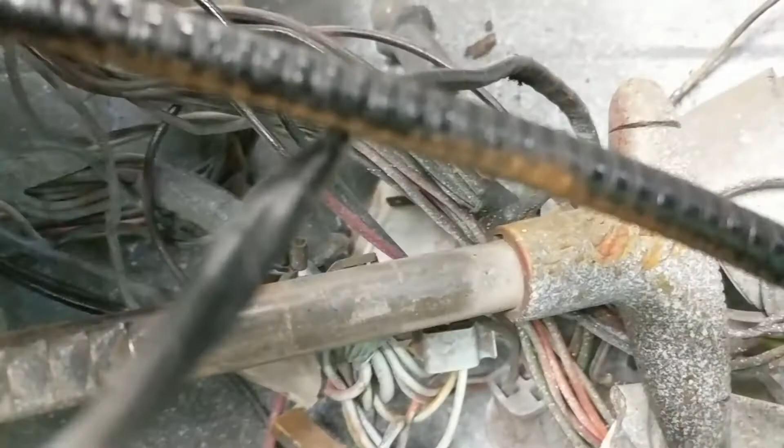I'll clean it up a bit and get it looking a little better. This, like I said, is the newly painted one. I've got to finish the back side. Did some wire brush on it, just clean up a little bit. So that's your speedometer cable there.

Like I said, I need to get a new handle if I can. Those are typically red, and I tried to wire brush it just a bit, it just fell apart. So I don't want to do any more damage to it, I just want to be able to use it.

My new brights, low and high beam. You'll see the cable up here for the parking brake. Obviously that's a gaping hole, I don't want that. I'll fix all these holes.

There's my hood hinge with the dum-dum on them. So I'll make sure everything's nice and real tight. There's mine, I'll get to spray that down real quick. But I'll get that wrapped up.

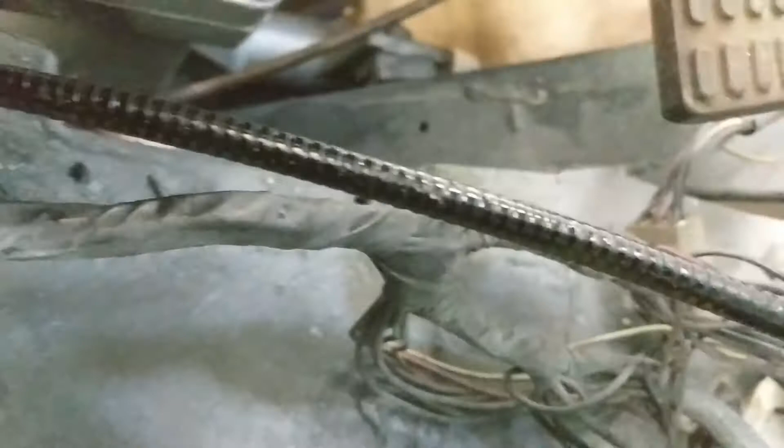So I'll have the parking brake, speedometer, and potentially the shift knob and shift lever in today. So I've got to wait for this to dry, I'll put another coat on it, a couple more coats.

So anyways, what else? Got some more brake line in, making a mess. Got some more ends, these are the 3/8 ends that I need to get into here, and I need to route this guy somewhere into this guy, into this proportioning valve.

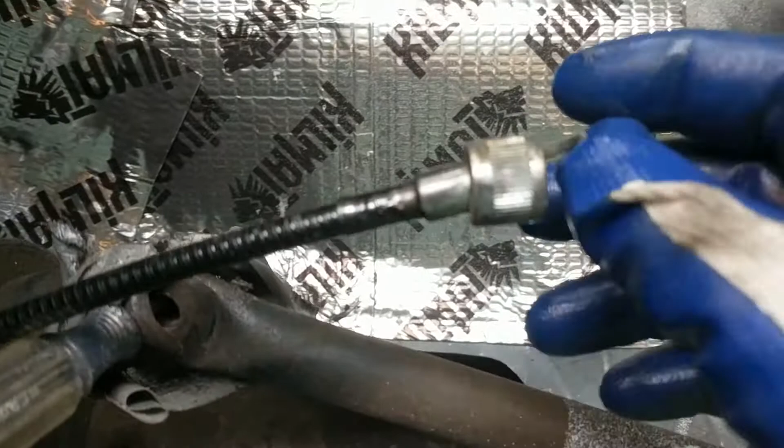What else? That's it right now. Okay, speedometer's in, and you'll notice once you get it in, you obviously can't spin anymore. Shift knob, the shift cable right here, you pull it out.

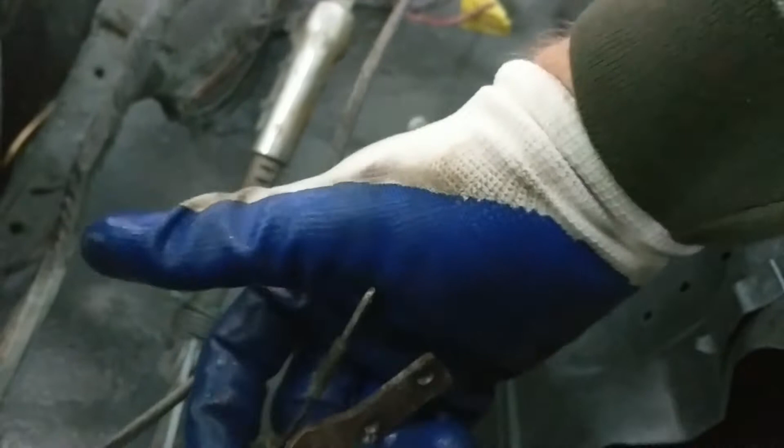It doesn't have a lot of play. It's got fairly fine changes, so you'll be like, wait a minute, is that actually shifting? And yeah, it's actually shifting.

It's got a real fine feel, but now one thing is, once you get this guy in, you actually push the other end, it's got the hole, and there's that big piece of steel. Once you shove that in, I think once you do a final push, if you push this in as far as you can...

I'm going to go back down here and see if I can pull it out. If I can, it hasn't gotten the latch. There's a needle with a little slot on it on the other end, and it's got to go fully into the seat, and it actually passes by a clip and connects, and you can't pull it out again.

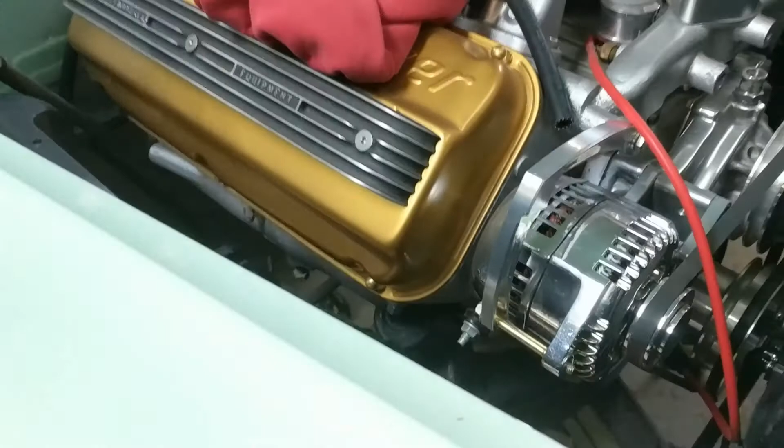Pretty big and pretty rude, but I really hate these brackets, nothing I can do about them now.

Got a radiator cap, I need another one, forgot about the second one I need.